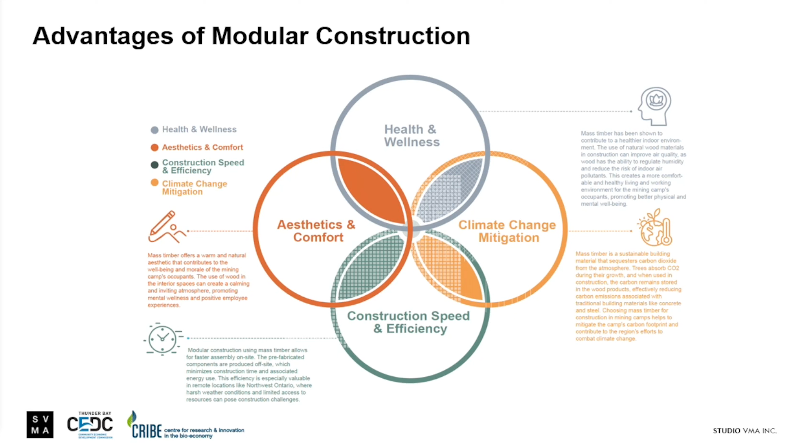Mass timber had several advantages and opportunities, including climate mitigation through low carbon processes in the making of the mass timber, construction speed and efficiency, and its durability and long-term advantages of the structures.

So just to start, I'll take a moment to explain mass timber in itself. Mass timber is a little different than the conventional stick frame wood construction that you would think of. It is comprised of laminating 2x4s, 2x6 products together to make massive sections of wood. And what this really does is that it creates an exceptionally strong and versatile material that could be used for structural supports, structural walls, beams and columns.

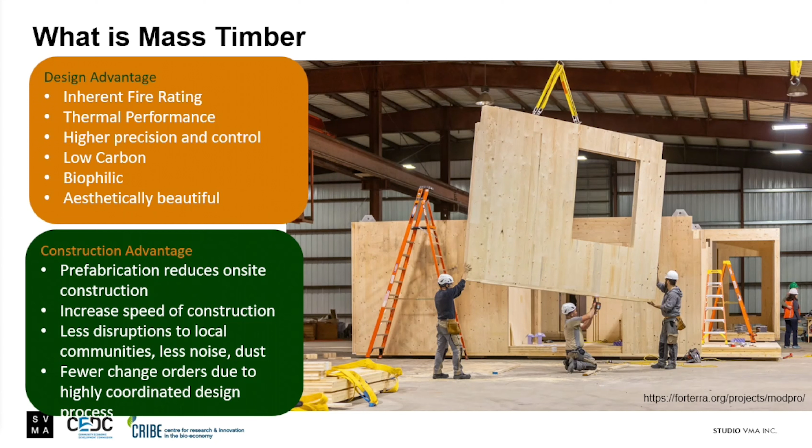It has inherent fire-resistant qualities, and it has aesthetic and comforting qualities, especially when it's in an exposed situation. As I mentioned, it's very durable, and it leads into prefabricated construction methodologies, which also results in speed of construction and durability.

So Canada is a leader in mass timber construction. It is not a new technology. It's been occurring around the world for many years now. And in fact, I think the latest report suggests that we have over 760 mass timber buildings and projects happening or built in Canada. And other provinces like British Columbia have a wood first program, which really encourages the use of wood and mass timber as the first option in construction. And oftentimes in many buildings, mass timber can replace the use of concrete and steel.

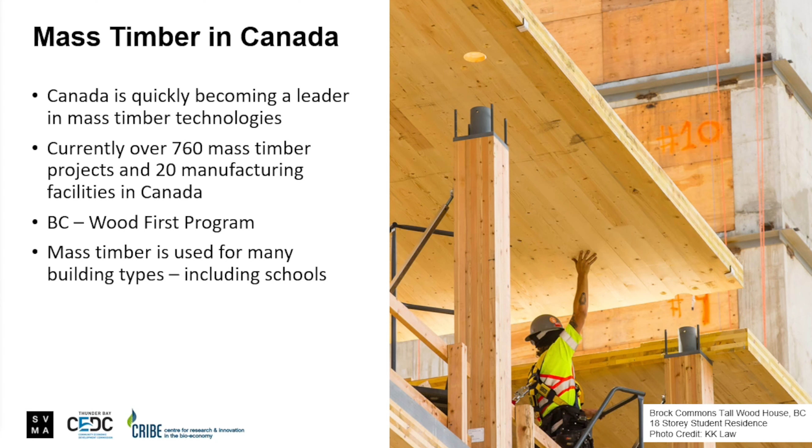This is just an image of a prefabricated cross-laminated timber structure that is made in a shop and then transported to site.

So we began the conversation in the study with a discussion rooted in biophilic design. And biophilic design literally means the love of living things. So biophilic design states that connecting humans to the natural world can significantly influence and reduce blood pressure, it can reduce stress, it can increase productivity.

And these are studies that are happening around the world now to really understand the advantages of being and living in natural environments, living with natural materials, and biophilic quality of design. And as Canadians, we spend nearly 90% of our time indoors, so thinking about indoor quality is really important and ultimately leads to the health and retention of people in communities.

Natural materials and biophilic design also is proven to increase productivity. So in office environments, for example, people are known to call in sick less, and they're happier and have more productivity. So there's lots of great advantages to live and work in wood buildings.

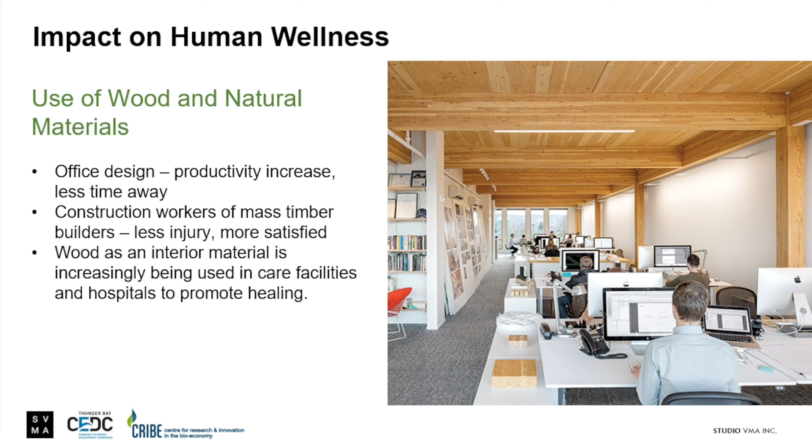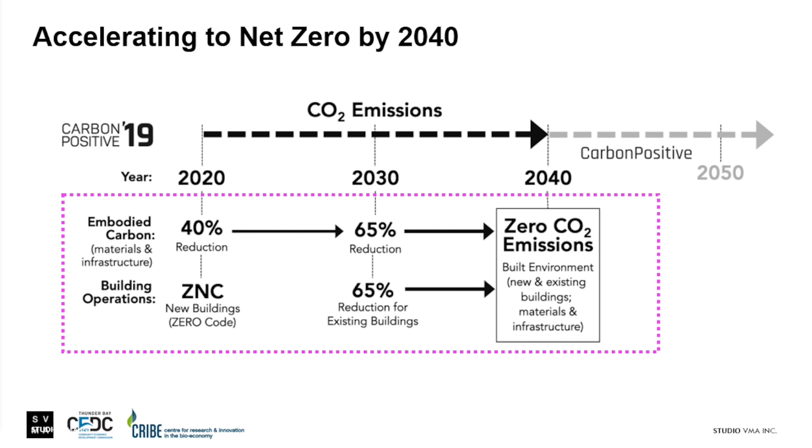Also, one of the considerations that we always think about is the regulations that are occurring around the world and are starting to be seen in Canada; there's a need to take action on reducing carbon. And so thinking about how we can reduce carbon in our buildings is a really important topic, and thinking about the embodied carbon of our buildings is an important topic.

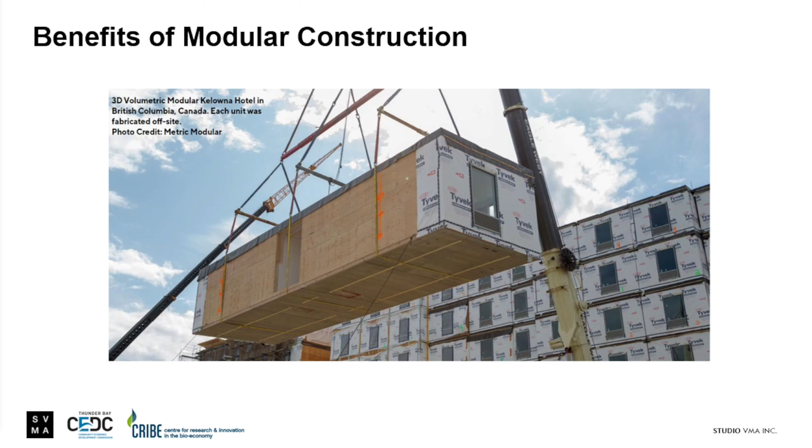So this is just an image I wanted to throw in to show the prefabricated structure lifting into place. And this is similar to how we approached the prototype design of the modular buildings. So I'm just going to walk through the design itself and how we approached it and some of the benefits that we found from the study.

So first of all, our site was really speculative. It was undefined, but we knew that it would be in the northwest Ontario region, so north of Thunder Bay, and so that was the area that we looked at in terms of the design of the project.

When we started the design, we considered a number of different construction techniques and methodologies, and we quickly eliminated site construction because of the remoteness of the site. Having materials brought and built on site wasn't really realistic. We looked at 2D elemental fabrication, which meant that components like walls, beams, columns would be brought separately to site. But then again, it also required a level of assembly on site.

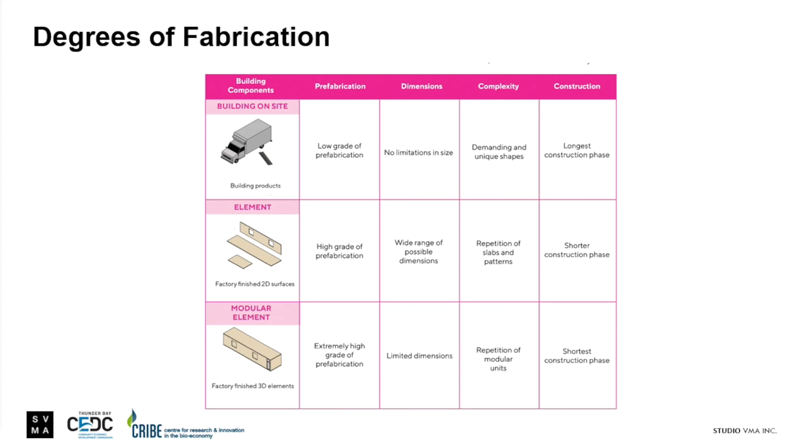And so we really wanted to push the ideas of off-site prefabrication of the buildings, where they would be completely fabricated in a factory, perhaps in Thunder Bay, and then they would be shipped to site and connected together very quickly.

The program that we utilized included an occupancy of about 250 people to start. We had living quarters, we had community buildings like dining halls, dry houses. We also had an office building scenario for which we developed prototype plans that are included in the report. And the living quarters in particular were about 80% of the site, so this is where we focused a lot of our attention.

We understood that the site would have maybe about 250 people to start, and then perhaps within 2 to 5 years, once the mine is built and moving into operation, there would be about 100 people moving forward. And so what this meant to us is that we needed a solution that was scalable, where the buildings could be unplugged and moved when they weren't in use anymore, and they could be reused, perhaps sold or reused for another mine. And I think there's a conversation there about long-term durability.

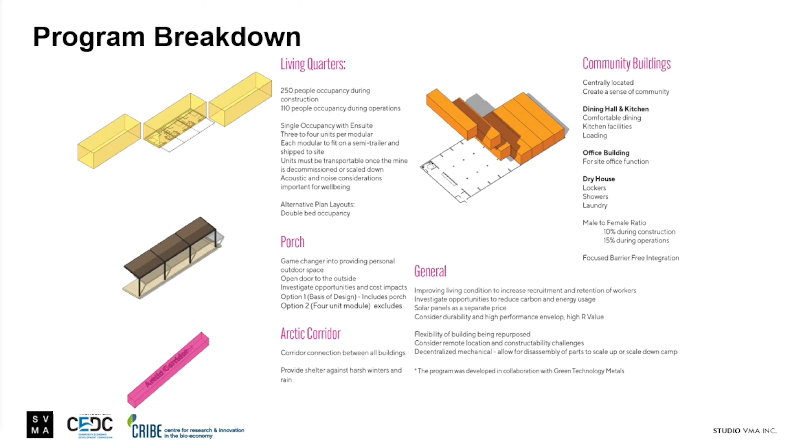We also included in the design of the living quarters an Arctic corridor that would connect the living quarters together. And one of the things that was expressed was that perhaps having an outdoor area for the workers, like a porch, would be a value add to consider for retention and health and wellness of workers.

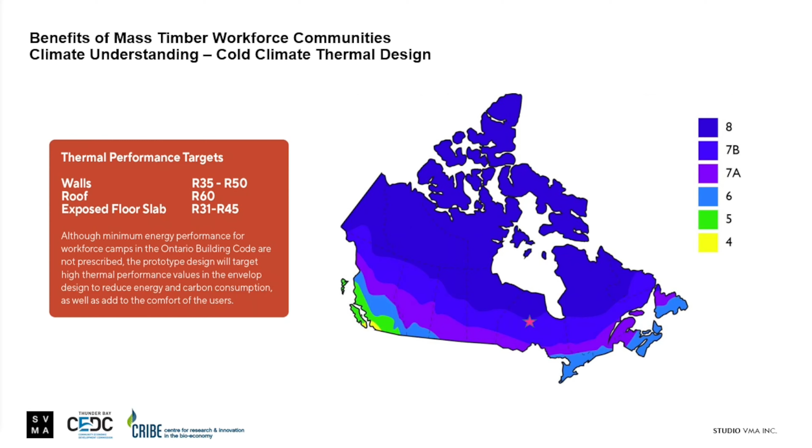One of the things that we really wanted to address was energy performance of the buildings, and right now the building codes do not require minimum energy requirements for temporary workforce housing. And although it's not technically required, we wanted to push the boundaries and think about how we provide a high thermal performance building, not only to reduce energy over time in the operation of these buildings, but also to think about the thermal comfort of people living and working in these buildings.

So in our design, we designed for very high thermal performance of the walls, ceilings, and roofs, and later I'll show you what the carbon outputs of that were.

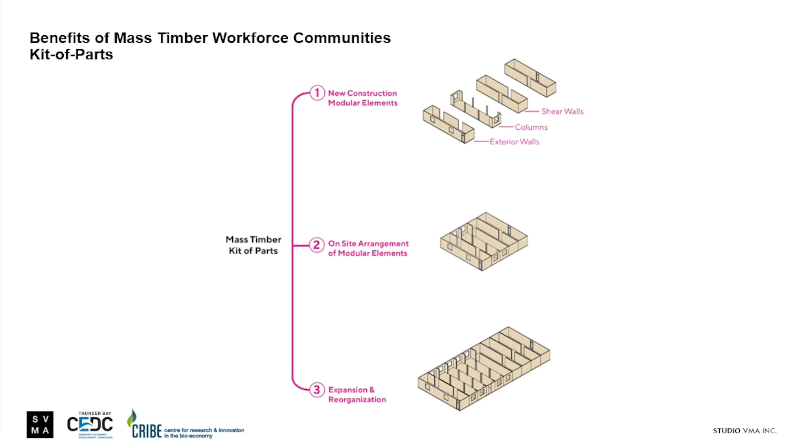In the prototype design, we designed a series of modules that basically are a kit of parts where you can pick and choose the different components and connect them together on site. So for instance, if you would like to create a recreational facility, you can pick and choose the components that would work for you and connect them on site. And so there was a modularity and repeatability aspect, which also comes down to the economics of the units as well.

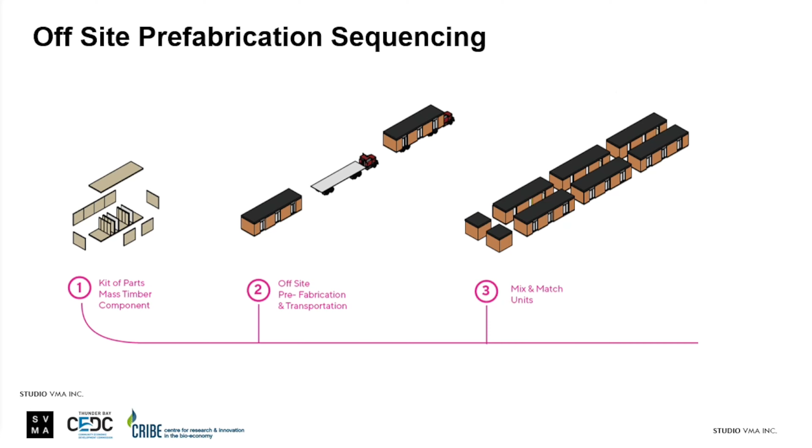This slide and the next slide will just show you the sequencing of how these structures would be fabricated. We imagined that the cross-laminated timber slabs, about 15 meters by 3 meters, would be brought to a facility, perhaps in Thunder Bay, where they could be manufactured, dressed with the connectors, and then made into the buildings. Complete buildings would be shipped from the factory to the site where they would be assembled depending on their arrangement.

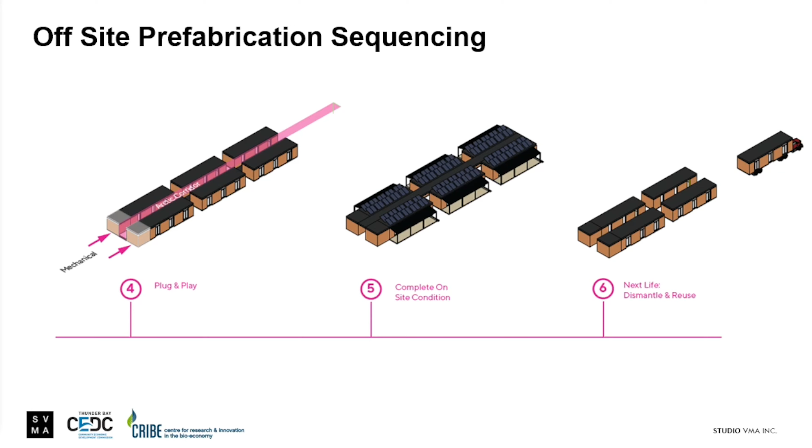They would be connected with an Arctic corridor. They would run services, perhaps add the outdoor porch, solar panels, whatever additional elements were needed. And then at the end of its use, they would be unplugged and moved so that there was an ability to reuse these structures over and over again. One of the key aspects of mass timber is that it's a very robust and durable material that can withstand lifting and shipping multiple times.

So a key aspect of this project is that while traditional buildings that might be used might have a lifespan of about 10 to 15 years, these buildings would be 30 plus years. So at the end, you would have an asset at hand.

I see I'm almost out of time here.

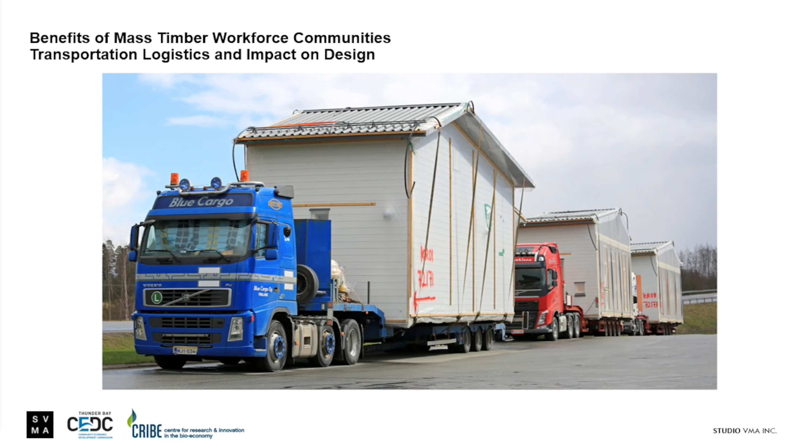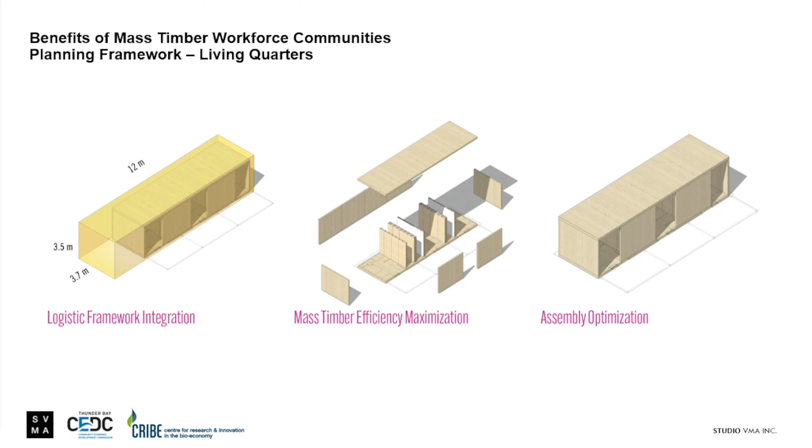The logistical framework was very important in terms of moving the structures. So we started with the maximum size, and we had a consideration between optimizing the cross-laminated timber structure as well as the shipping aspect. So we used one slab of cross-laminated timber for the floor, for the roof, for the walls, and then lightweight frame construction in between the units in order to achieve acoustical properties.

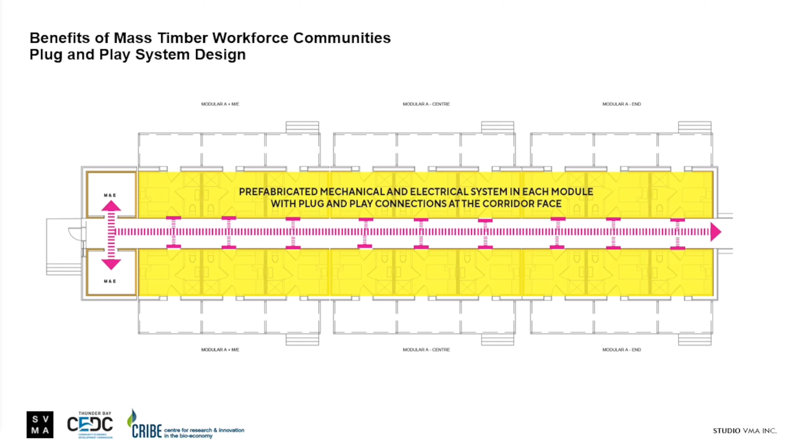There is a high-performing envelope, and I just want to move to this slide. So the units themselves would be clustered together, and the services would be provided through an Arctic corridor, and at the end of its use, they could be detached and moved again. So again, it was a bit of a plug-and-play scenario where you didn't have to modify the properties of the units themselves by moving them around.

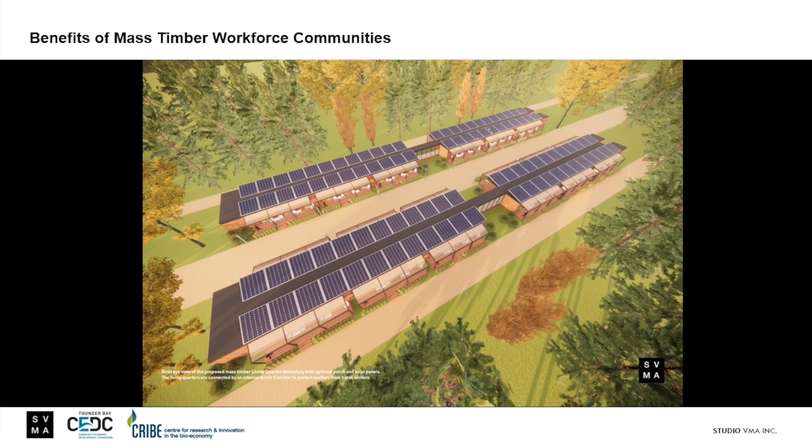This is a view of a single unit, although for the sites we imagined that the units would be clustered in clusters of 6, and then they would be separated by a fire separation and clustered again, and this would optimize the servicing of the site.

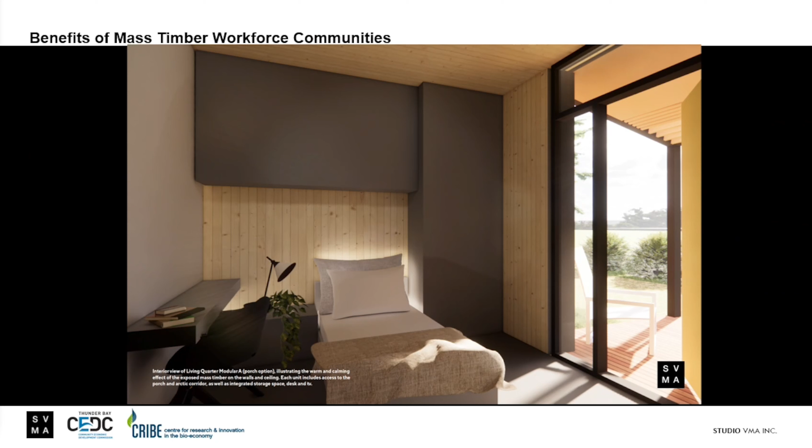This is a view of one of the interior units, where we tried to leave the mass timber exposed as much as possible to take advantage of those biophilic qualities that I had spoken about before. They're very compact units. Each unit has an ensuite washroom, and each module contains about 3 units.

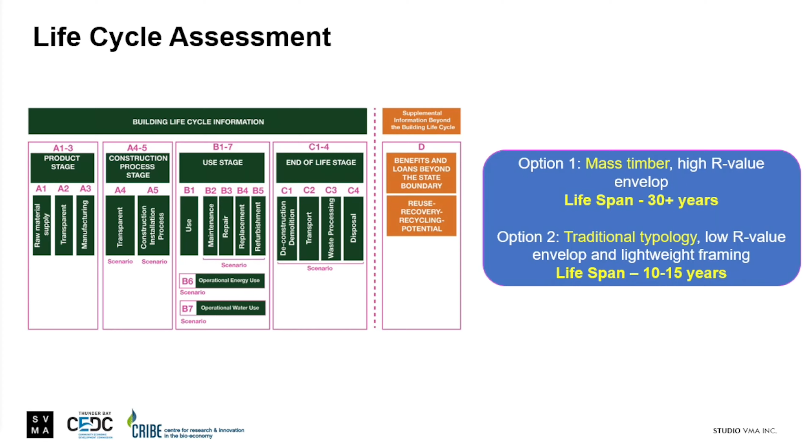So just to conclude, I wanted to walk through the embodied carbon analysis. First of all, the life cycle assessment of embodied carbon looks at carbon through the production of the materials and the construction processes, a little different than operational carbon, which looks at how much carbon is used when the building is in operation. With life cycle assessment, you think about when the material is extracted, when it's being built, when it's being maintained, and when it's being disassembled for end of life. And so this is a calculation we did.

Now, what's interesting is that the blue represents the mass timber structure, and the orange is a traditional building component that you might see in a mining community for one living quarter. You can see that they're pretty comparable in terms of embodied carbon, but it's not really an apples to apples comparison, because the mass timber building actually has a very high performing envelope, which means it has increased insulation. And insulation, in the products we have available right now, is actually high embodied carbon.

So it's not quite an apples to apples comparison, but when you think about the durability and lifespan of the structures, the mass timber structure would last 30 plus years, and the traditional structures last about 15 years, we assumed. And so you can imagine that there's double the carbon over time.

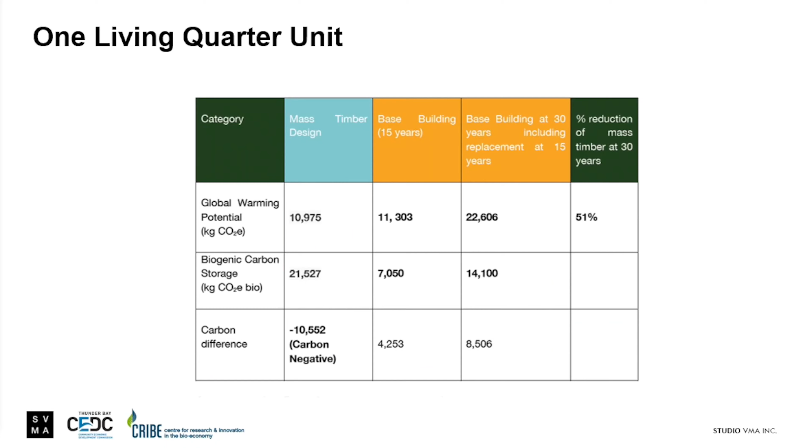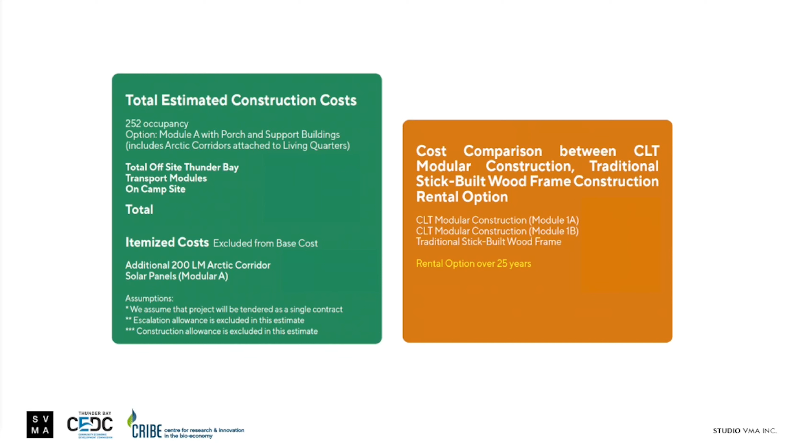Those are just metrics. We also did a costing analysis that's in the report, which is available. I'm not going to go through the numbers right now, for the sake of time, but it is there and available to understand the cost differences. We did a capital cost and also a rental option.

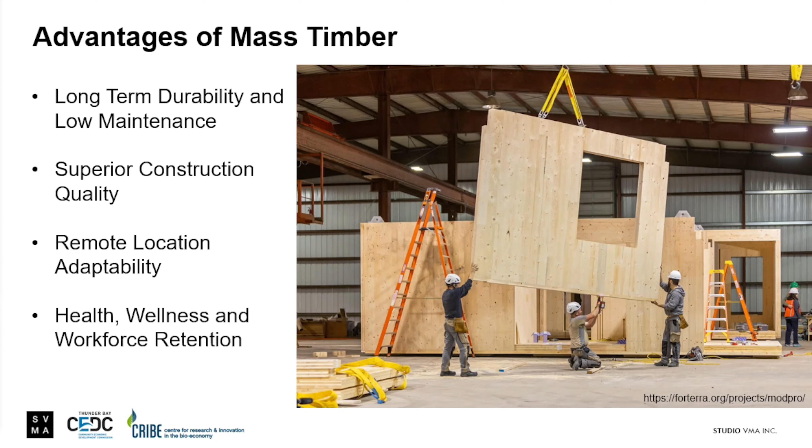And in terms of the advantages of mass timber, there were a lot of considerations that we concluded. Long-term durability and maintenance was key, in that these buildings will be robust, could be used over and over again, and could be assets at the end of their use. Health, wellness and workforce retention, and also thinking about efficiencies.